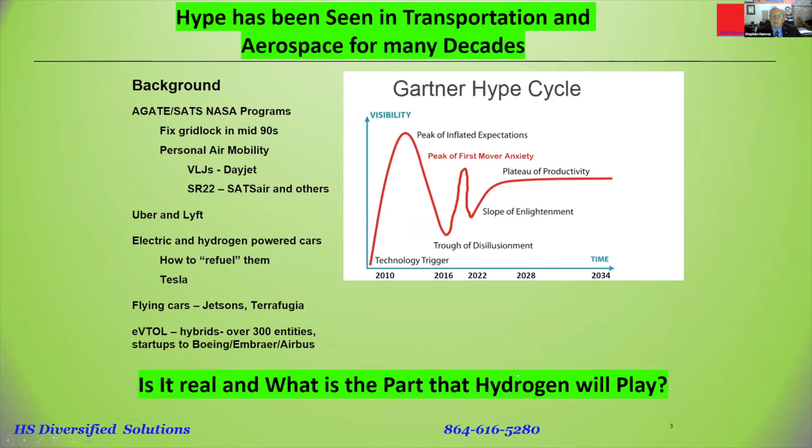Based on that, here's where I think we are today in the eVTOL and hydrogen base, really with eVTOL for all of them. We have just a couple of first movers. The problem is the technology readiness levels, as NASA defines them, are still at the R&D level for aviation applications for the size aircraft we need to carry 2 to 5 personnel, or to go a longer range than current batteries can do.

Standards are needed for both the fuel cells and the power modules, so that we're not dependent on one company's standards like we've been in the past. I use the example of all the different connectors for USB - for one connector, you might need multiple. We'd like to have a standard developed.

We also need standards for vertiports and heliports. We know what it is for current rotorcraft, but we need simple standards because it becomes more personal transportation. I have an extensive rotorcraft and fixed wing background, and I've landed in a lot of really strange places in rotorcraft that were very small - they don't have to be a published airport or a large real estate development. So infrastructure is very important in terms of how we set the standards and how simple we can keep it. I believe we need pre-competitive standards for hydrogen due to the technology readiness level, and standards for the infrastructure.

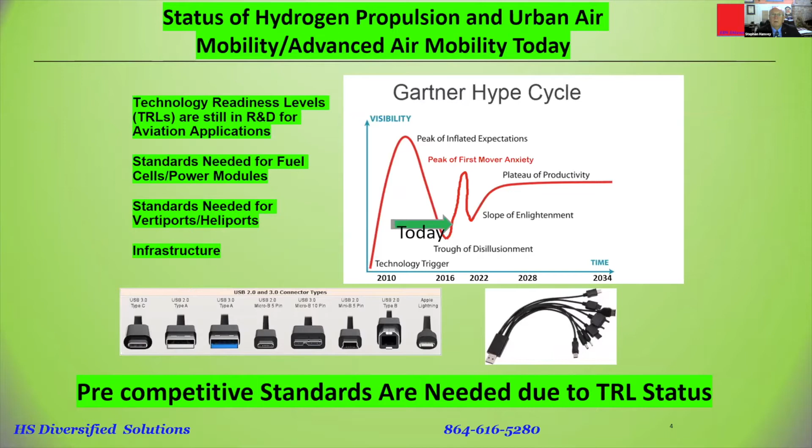So this is, again, my personal opinion. We need to be up here to go into full certification and production - technology readiness levels of 8 and 9. And we need to be in certification at this level, 6 to 8.

But right now, the main areas of liquid fuel cells or gas fuel cells, liquid fuel tanks and gaseous tanks, as well as all the fuel cells - the way we use the heat that comes out when generating electricity, and the cooling with liquid tanks or intermediate pressure tanks - those are still down at the component development level and haven't reached high volume capable companies yet. They know it's coming, they know what they need to do, and I'm going to talk about that a little bit.

That's a holdup, and we have to progress through these TRL levels before we're really ready. That generates the time and dollars needed to bring it to full fruition as a viable customer entity.

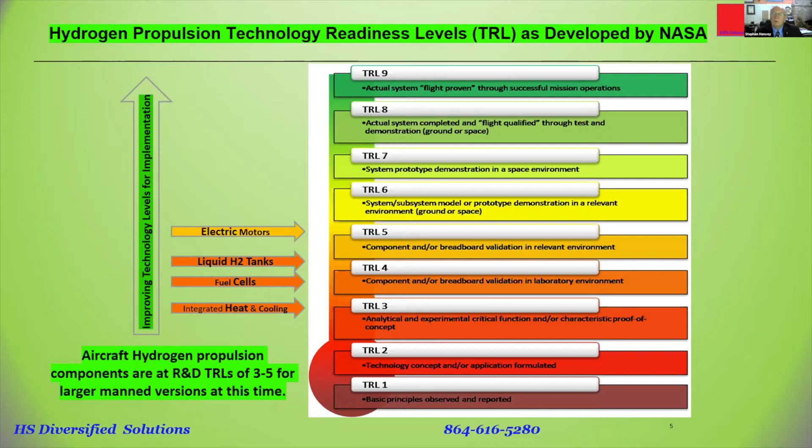What I did is take various public sources of fixed wing aircraft, from large airliners down to small general aviation airplanes, and looked at the percentage of the maximum gross weight for the operating empty weight - structures plus pilot - how much fuel you're capable of flying, and therefore what payload you have left. If you look, the trend from airliners carrying lots of people down through small airplanes, the payload percentage goes up slightly and the amount of fuel goes down. Then when you get into helicopters and rotorcraft, the weight of the payload goes up as a percent.

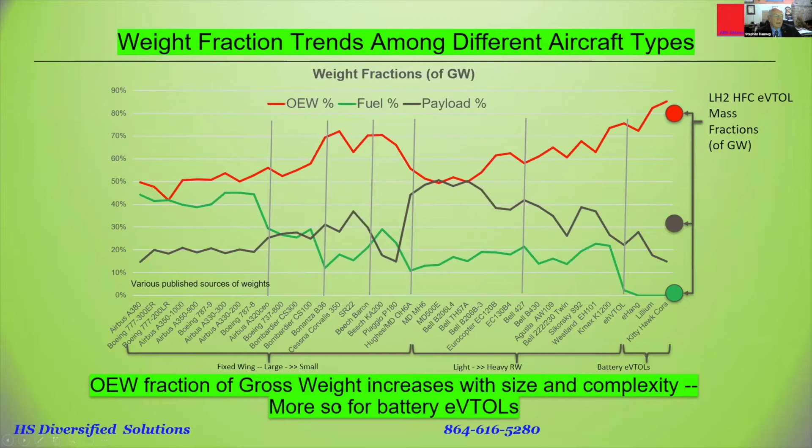This is because the percent of empty weight goes down, and the weight of the fuel stays low. When we get to the third category, the eVTOLs - battery eVTOLs and hydrogen eVTOLs - there's a very small percentage of fuel in the hydrogen case compared to any previous aviation, and there's no fuel for the batteries, but that affects the payload available because it drives the empty weight up. So as a gross generalization, for a liquid hydrogen fuel cell eVTOL, the mass fraction of its gross weight is probably going to be close to 80% for a 30% payload, when you have basically close to zero in terms of fuel - you're carrying your fuel, your energy, with you all the time. This may seem obvious to everybody, but as gross weight increases, the size and complexity drive that gross weight up, and the batteries right now just can't carry quite enough energy.

Having looked at all of that, I look back at general aviation. We started out with piston engines with lots of parts - radial engines with lots of pistons to generate the power we needed. Then in the 1950s and 1960s we moved into the turbojet - the parts were simpler, but it burned a lot of fuel.

Over time, we transitioned to the turbofan from the turboprop and the turbo shaft, the turbofan used in general aviation airplanes with a prop or without a prop, and the shaft used in a lot of the rotorcraft. The technology came from the inner parts of the engine and how they used the fan to take advantage of the exhaust.

At this point, and I'm not advocating for any given fuel cell company, the balance of plant, all the connections you have, are very important. They drive the weight in the fuel cells. Some companies have started out fairly complex, then gone down and become a lot smaller, but their amount of kilowatts per kilogram is very low compared to what's needed to carry 2 to 5 passengers. That's the challenge we have.

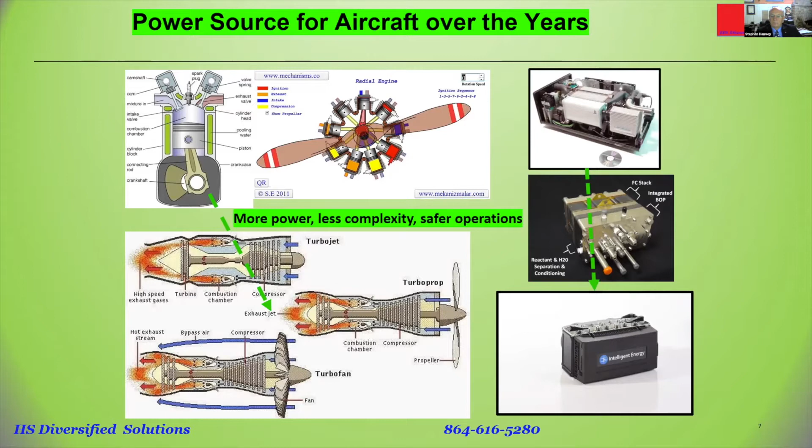This is the type of thought process that we need in the industry to move out of R&D into the technology readiness levels for certification and production, at a gross weight level that will allow us to carry passengers safely.

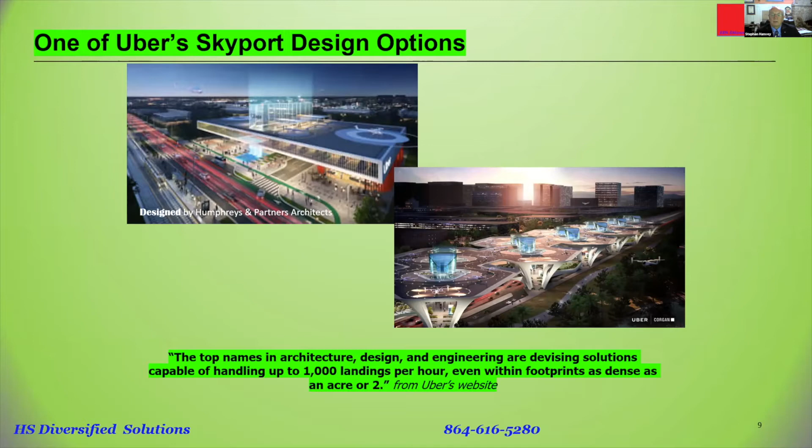Instead, I argue that we have a lot of real estate today in parking lots, sports venues, vertical parking lots, and small innovative concepts like SkyDrive has done, powered by hydrogen, although it's by battery today, that can utilize a very small percentage of this parking lot. And that's where the vertiport standards need to come from. The reason I say that is there's an infinite combination of going from parking lots to personal homes, to sports venues, to schools, to businesses that don't have to go to a central location with this large real estate.

And there are creative ways in certain parts of the world where you can have combined modal transportation and land a small vehicle by creating the right landing space. This is not as big a real estate play as it is in the major cities.

When I ran the company SATSair with 26 SR-22s, we landed on an annual basis in 500 airports. That same area only has 35 regional airports and only 5 major airports that have the large airplanes. So we had a large number of operations that could be done very close to where one's office or home was, and that gave people personal control of their transportation. I think that's what the basis of urban air mobility and advanced air mobility will become as it fully develops over the next couple of years.

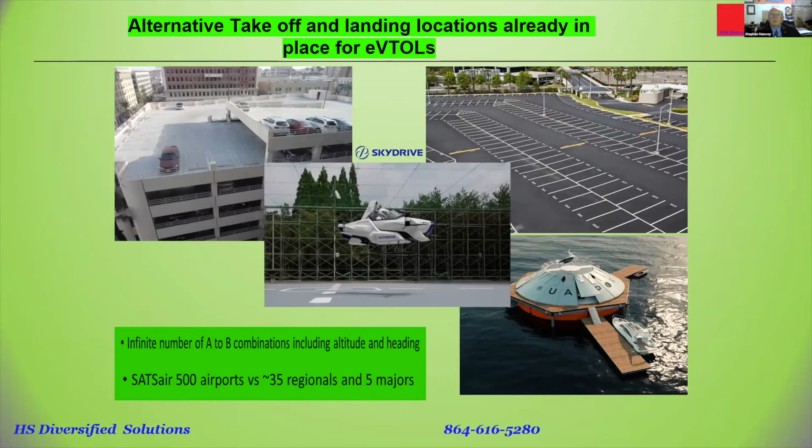We're familiar with hydrogen energy relative to batteries, but I just wanted to highlight it has so much specific energy here. There are people who prognosticate and have a diversity of opinions on cost requirements and what is really the bottom line efficiency when you look at transportation cost, heat losses, and other things that go from battery versus hydrogen versus internal combustion.

Some people think the battery gives you the best overall efficiency. It's not the cleanest because we have a lot of recycled cost, so that's probably closer to 60% at the best. Whereas in hydrogen, if we do co-location with wind and solar or find ways to break through in electrolysis close to the source, that number can go up significantly, and maybe it's closer to 50%.

When we look at heat recovery, when you generate electricity with a fuel cell and the cooling you get out of liquid when it goes to gas, you can recover maybe 40%. So that number may be closer to 60%, putting batteries and hydrogen about the same, but they're still much heavier, and we have to have the infrastructure developed. So there's diversity of opinions about how much it costs to go from solar through the processing and transportation to ultimately get it here. The cost of hydrogen at $12 to $15 per kilogram needs to come down below $5 per kilogram, and that can happen by putting some R&D into this area as well.

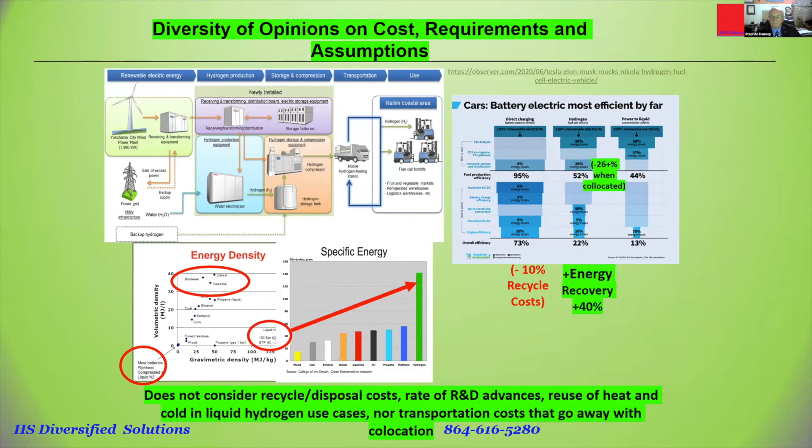These are examples - again, I'm not advocating for any particular fuel cell company - but there's been a standard that SAE has done that's been accepted worldwide for hydrogen station standards. We need to come up with a standard for how we connect together to put in gas or liquid hydrogen, in the same manner I showed the connections for USB at the beginning. But you can see the balance of plant is different at different manufacturers, and we ought to standardize that, because where individual fuel cell companies can make their money is in getting low cost balance of plant to some standard.

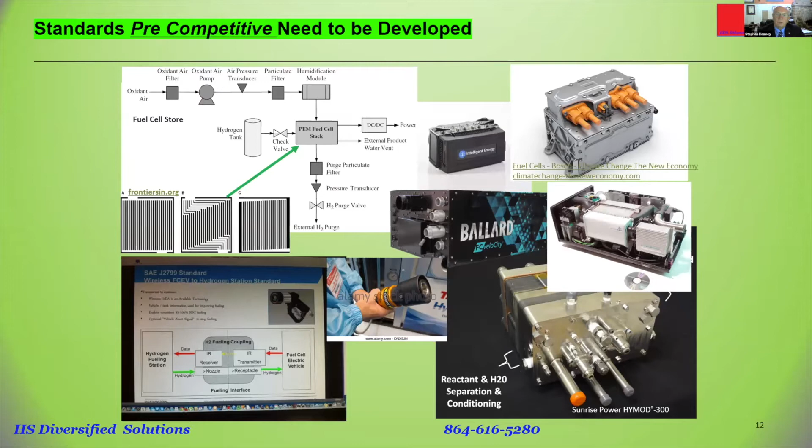And this is where the real frontier is. We know that hydrogen generates about 1.4 volts of electricity, but we're only able to use about 0.6 of it today, and maybe we can get up to 0.7 by the way we introduce the hydrogen in the flow fields within the fuel cells. Just an increase from 0.6 to 0.7 would represent a 15% improvement in power and fuel consumption.

So I don't think there'll be one winner, as I said earlier. I think it'll be a combination. Out of those 300, there'll emerge 10 or 15 companies that will truly plot the future for eVTOLs, and it'll be complementary. Aviation Week and Space made a comparison of the different types of vehicles - cargo, personal, lift + cruise, multi-copters, and vectored thrust - and how many people are back in the concept technology area.

This is the low technology readiness levels that NASA talks about. There's only less than 5 that have gotten out here where they're doing things with battery and trying to make commercialization happen, such as EHang and Kitty Hawk right now, where Beta and Joby are, and Boeing, and where the FAA sees some of these programs. So we're going to have a migration, and I showed it on purpose, from lower size, lower complexity, lower cost, lower technology, lower weight to the higher ones.

And ultimately, maybe we'll get to the anti-gravity. But this causes us to increase the direct operating cost as we get more complex, as we get heavier, and the acquisition cost goes up. And I might add, that's for the personal air transportation. As we do it for regional transportation and come up with those concepts, I haven't addressed that specifically here. As you get more passengers in the vehicle, then obviously the cost can come down.

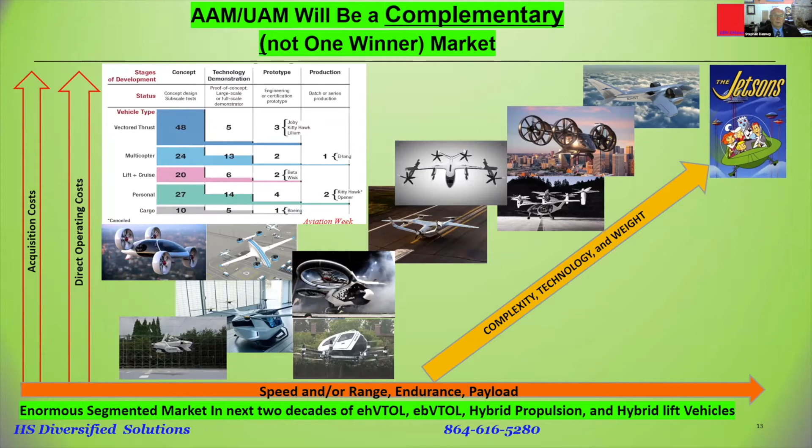And I base this on history. This was a presentation done in 1999 by Dr. Bruce Holmes on the impact of speed over time, as we moved from horses being replaced by cars, and the speed gradually came up. What was important was how fast you went from the door of your house to another house, or the door of your business to another business. As we did this, people started moving to different locations as well.

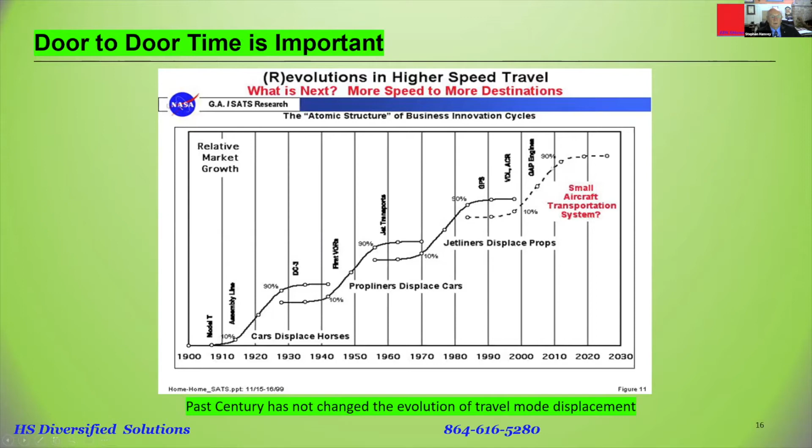COVID-19 has certainly made an impact on that. The personal computer, the ability to work from various locations, to have a virtual conference like we are today, affects where we can work. So that will affect, I believe, the market and how well we do with that market.

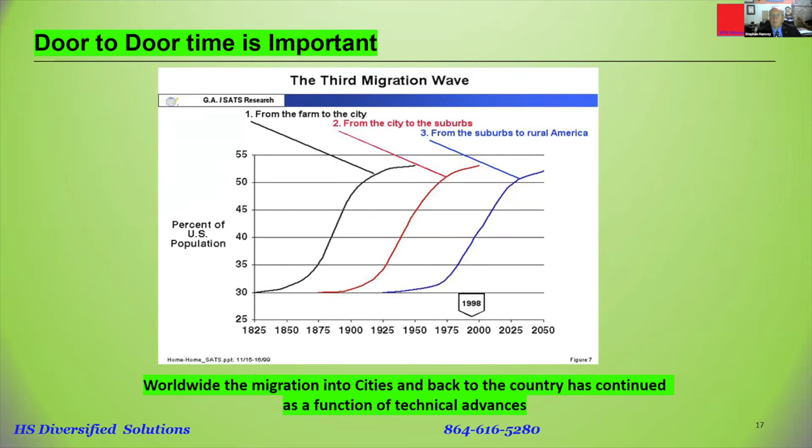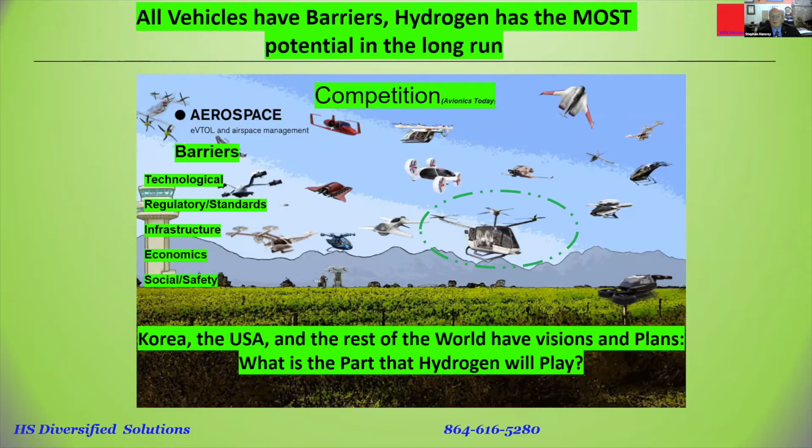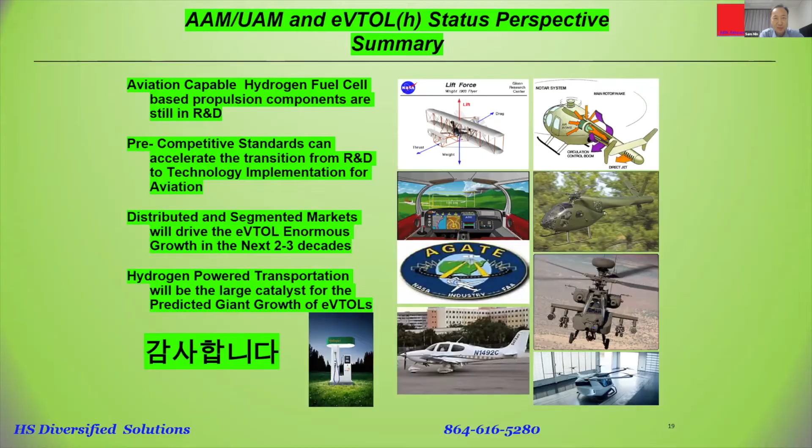We were supposed to have the first panel discussion, but the speaker wasn't available. Phil is here. I propose we go back to panel session 1, since Val is in England, if I know correctly. Considering his time zone, I'd like to propose we go back to panel session 1, then come back to panel session 2. What do you think, Val, are you ready? Yeah, this is Val, I'm actually in California, so if you want to continue with panel 2, that's fine, and then I will join in. Okay, thank you for your understanding. Then why don't we just finish panel session 2?

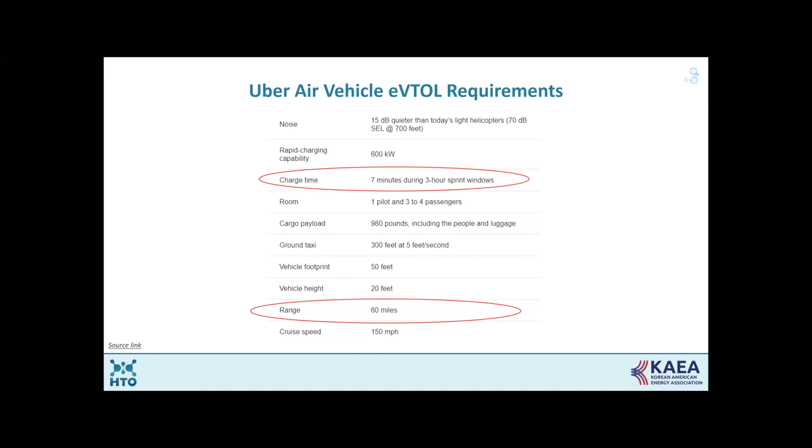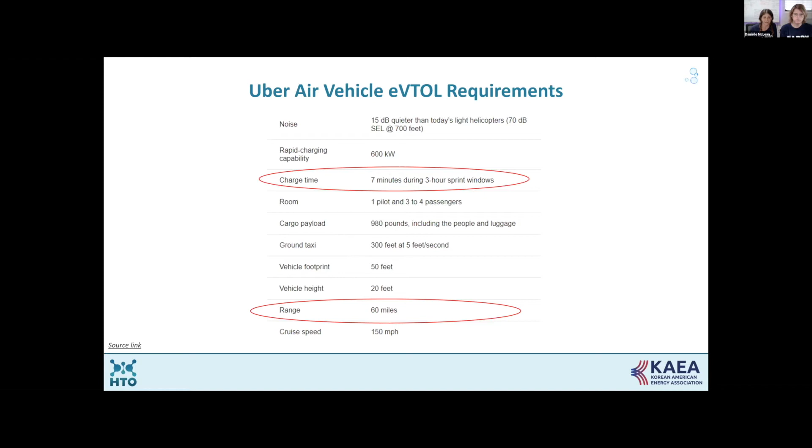A lot of you are probably familiar with these numbers, won't spend too much time on this slide, but in the US we lost 300 billion dollars in 2018 just from sitting in traffic. Back to Uber Elevate - they released requirements, I think in 2018 or 19, for what they'd like to see in charging times and ranges. About 7 minutes charge time - if you're looking at a battery powered eVTOL, that's going to be very difficult to achieve. We've heard of rapid charging batteries coming online, but we don't see them getting to these fast charge times in the projected timeline Uber wants. Further, the range of 60 miles - there are people that can do that, but we feel like we can do better. Let's make a longer range and create a way to charge or refuel them quickly.

This kind of goes over what Uber said they need. That top row shows energy density, specific power, and charge time. What Uber wants - that charge time was 7 minutes, we just rounded it to 10 - and then where current lithium ion technology is. So the energy density looks really good, but the specific power does not. Sorry, I said that backwards - the energy density does not look good and the specific power does. I was thinking of hydrogen when I said that. And so, just like Steve was saying, the idea is basically to use batteries for the takeoff and landing.

We don't see hydrogen being able to do that right now. And to be honest, we don't even see a path to get to that. That would be an interesting area for somebody to look into.

So we see batteries being used for takeoff, that's where you're really drawing a lot of power quickly. So you're going to use batteries for your takeoff and landing, basically your vertical operations. And then when you go into cruise, that's when you can use hydrogen.

And if you use hydrogen for your cruise instead of batteries, you can really extend that range. That's why you see the hydrogen eVTOLs having 200 to 300 mile ranges versus the battery ones, which are 50, 60 miles. Some of them say 120. I'm skeptical.

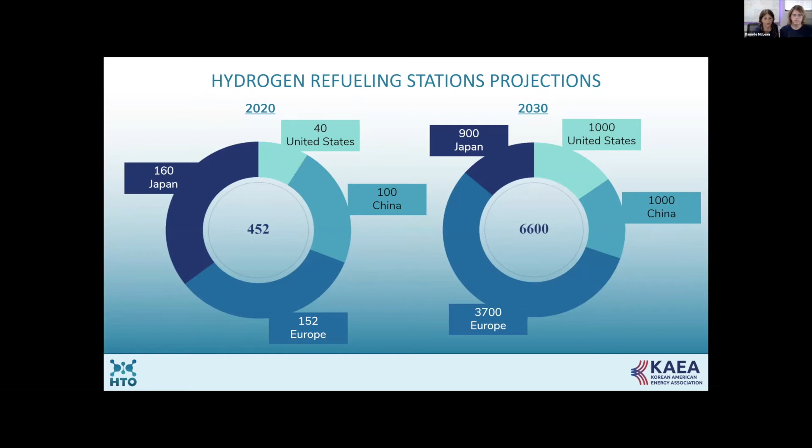So this is our vision. We really feel like the reason why we've included the automotive infrastructure for hydrogen in the previous slides is because we see a vision like this, where if you've seen what Nikola Motors is doing with their heavy duty trucks, the power demands for those trucks are very similar to what we would need in our aircraft. So we don't see any reason why we can't share that infrastructure.

One of the downsides of hydrogen is that it's expensive. One of the things that makes it expensive is the transport cost of the hydrogen. So we believe if we make the hydrogen at or very near to the location where it's going to be used, you can eliminate a lot of those costs, and then also use as much renewable sources as you can to produce that hydrogen.

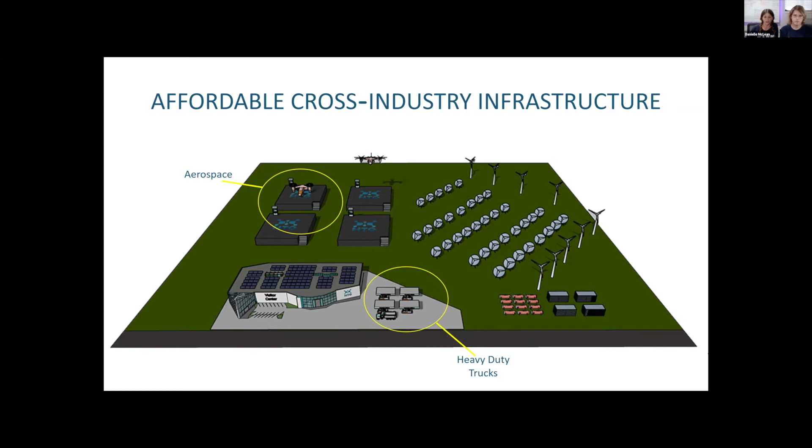So again, this just repeats what we had in our last slide in a 3D version. I really like what Steve said about the Uber Elevate concept of infrastructure just not being feasible.

I think the mayor of LA mentioned that at the Uber Elevate conference, that it wasn't feasible. We actually went to the city of Los Angeles and talked to a lot of them, and not only did they not think it was feasible, they didn't really like the idea of having all these landing locations on top of rooftops. It makes for some really cool pictures for NASA, but it would be very difficult. They felt it would be a difficult sell to the public - how do we sell this as something people are going to want? Has anybody even talked to these building owners? Who's going to pay for that power? And even considering renewables, you just don't have enough real estate on those rooftops to do anything meaningful. So we don't see that as a path forward.

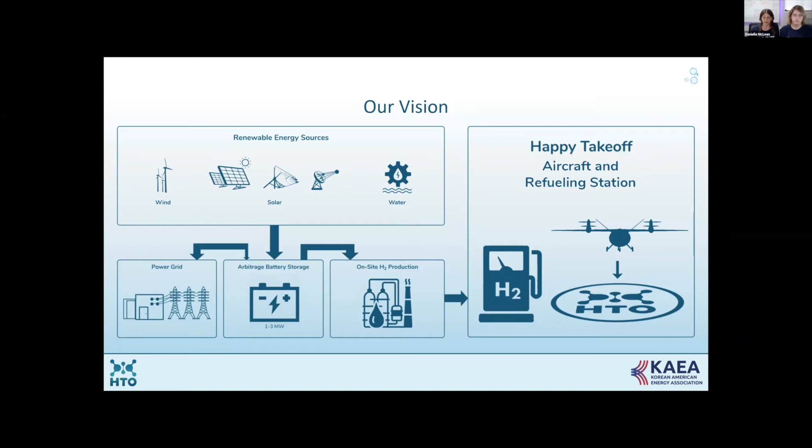We like the parking garage idea, also kind of rural ideas. And then we'll go into public perception.

Public perception of safety - a lot of people, the first thing they think about when we speak of aircraft powered by hydrogen is the Hindenburg. I don't know how well known this is internationally, but here in the US it was an event that happened in 1937, right around the time video camera technology was allowing people to record these events and share them with the world.

This disaster, the Hindenburg, was an aircraft actually designed to use helium, which is much less combustible than hydrogen. But due to the geopolitical climate in the pre-World War II era, there was no helium available for Germany to fill this dirigible. So they ended up filling it with hydrogen, and it ended up crashing as it was coming in to land in New Jersey. It was caught on film, seen by everyone, and the effect still lingers today. It's definitely affected public perception of how safe hydrogen is to use in aircraft especially.

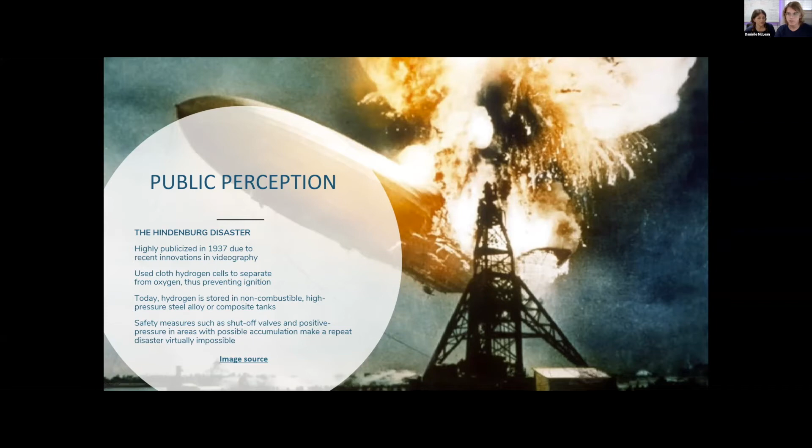Today we're using much more advanced and much safer technologies. So this is, again, Prism - this is our baby, currently in the conceptual phase. We're working hard to get our first scaled prototype made, which would be a small scale model that we're going to use to do some testing, some flight testing, and get some miles on there.

Our goal is to have zero emissions, which means we have to get completely free of fossil fuels to produce hydrogen fuel. We think it defeats the purpose to produce hydrogen using fossil fuels. Our goal is to hit a 250-mile range.

Like Steven said, some of our friends over at HyPoint - not necessarily advocating for HyPoint, but they're our friends and we like what they're doing. We're hoping we can actually surpass that 250 mile flight range. Refueling time we're hoping to be around 10 minutes, much faster than recharging. And we're looking at having a 1,200-pound payload, which would be roughly 6 passengers if you chose the passenger configuration.

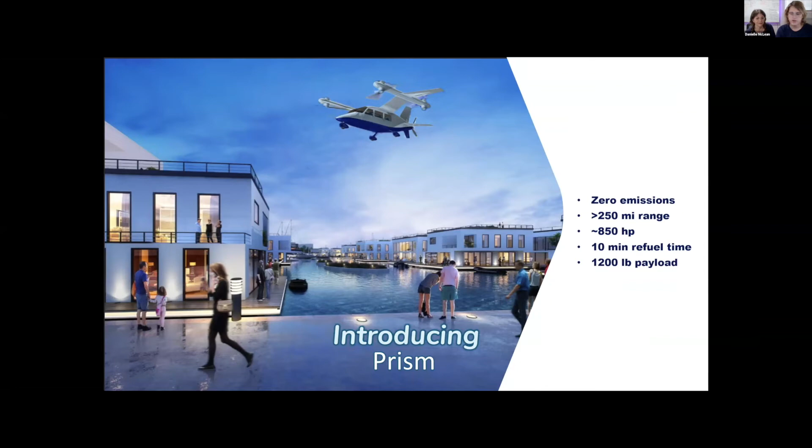Our aircraft was designed by Darold Cummings. He is one of our favorite designers - we think he's one of the best in the world. He designed it to be safe and to also fulfill the requirements of both Uber Elevate and the US military.

So the design has folding wings, which makes a very small footprint, so you can fit a lot in a small space.

The initial design is going to be capable of using AV gas, but the plan is to eventually switch over to a hydrogen powertrain. The AV gas would be used for potentially certification purposes only.

So we have a fixed wing. We're the only aircraft we know of that's powered by hydrogen and also capable of vertical takeoff and landing and has a fixed wing.

So we think that's kind of our niche that we found. And like Steven said, we don't think it's going to be one winner, we think it's going to be several winners. So we tried to find a niche that would complement our friends who are building aircraft as well, but that would allow us to thrive.

So like we mentioned, fewer refueling stations would be necessary with hydrogen. And like we mentioned before, it's going to be a hybrid system using batteries to power the 8 vertical lift propellers that you can see there. They're stacked, in stacks of 2, and they're made that way as a safety redundancy feature.

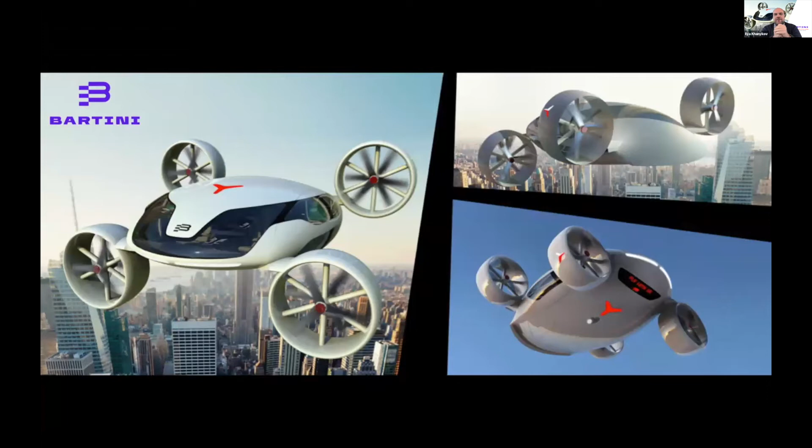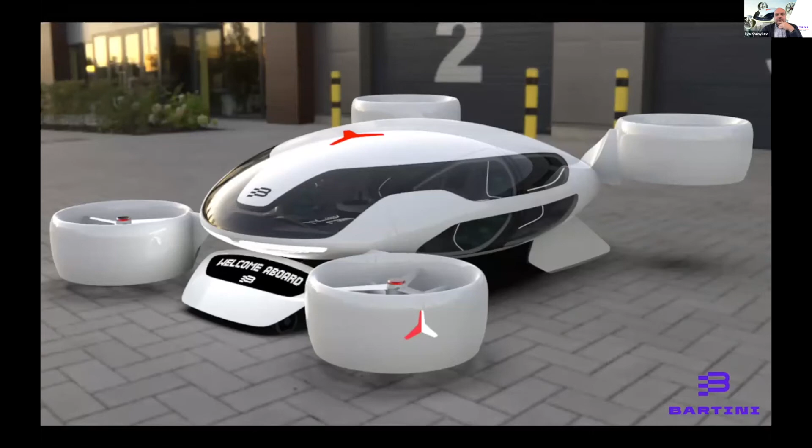I'm Ilya Kanikov, and I'm doing this electric vertical takeoff and landing vehicle called Bartini. We are a team of passenger jet builders who were possibly the first in the industry to team up with the best automotive engineers on the planet, Italdesign, to get you the two-seater and the four-seater, each of which will be powered by either a lithium battery or a hydrogen fuel cell.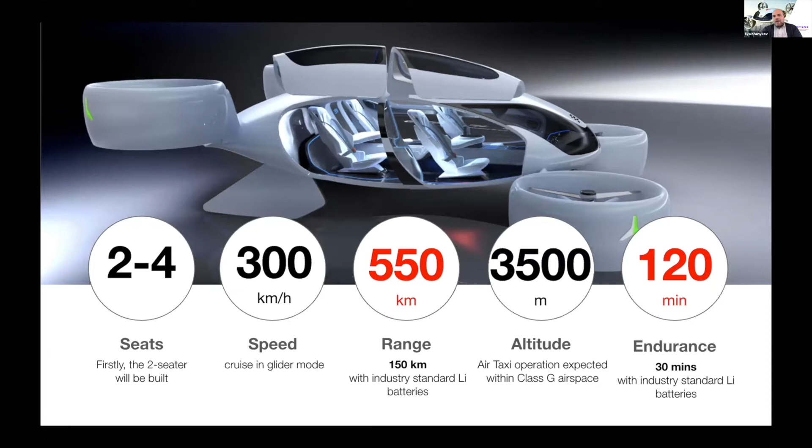Our configuration combines the benefits of hovers and winged aircraft, so it's a small footprint with flight efficiency. The wide carrying body will provide aerodynamic lift and the comfort of a spacious cabin. To that, we add low noise from the ducted fans and the highest safety standards of civil aviation.

For us, the choice between lithium and hydrogen powertrain means much more than a choice of a component or a choice of ground handling systems. It means the choice of scalability, the choice of price, and actually the choice of the future in which you as customers will get the service of transportation.

So we call this the operational perimeter. And the question is: is it about private owners in flying clubs, or commercial operators running massive air taxis? We believe, as we are now transitioning from ground to air, much like a century ago we transitioned from horses to cars, for the air taxi to happen, all peripheral systems must be ready to scale.

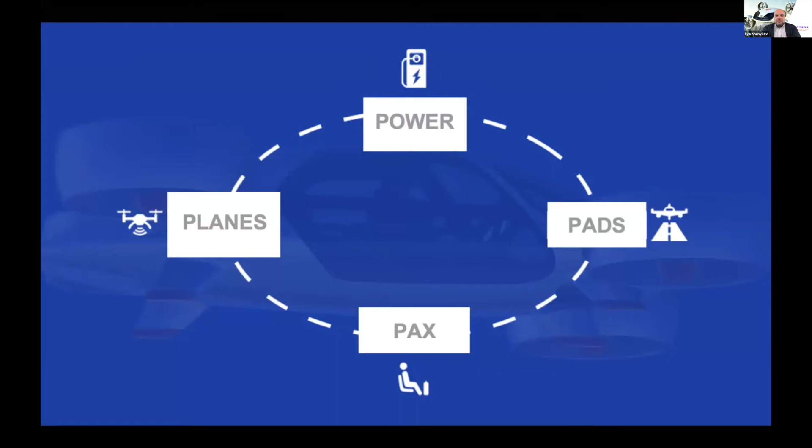I'm also an advisor to McFly Aero Infrastructure, a strategy think tank and consultancy for property owners. To become a technology integrator in the future, we deal with preliminary design of ground facilities and air traffic architecture in various parts of the world. That is why it is our job to trace dependencies and evaluate systems interfaces across the emerging value chain - the value chain for the service of flight, that is, not for the aircraft.

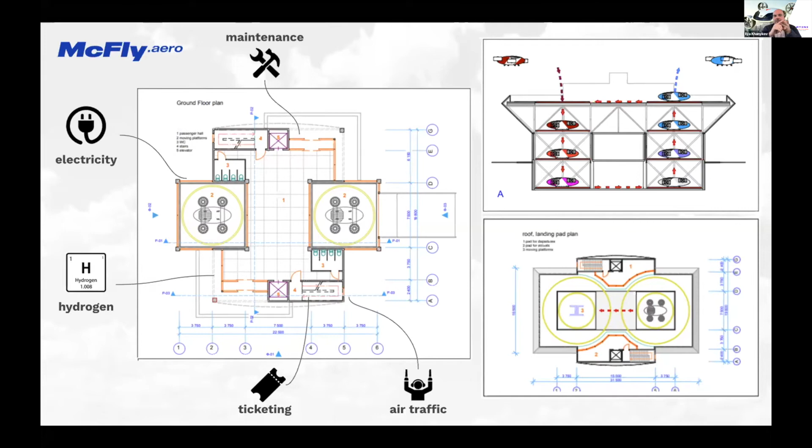The first question for air taxis is: what will it be? What will be the systems design? Will we fly between large hubs, or will there be a multitude of small landing pads? So sky hubs or sky stops.

Quite frankly, from the user perspective, what we generally want from transportation is to be on demand, seamless, and affordable. That's what we want. We also want controlled privacy. So far we may choose a bus, a train, a taxi, or a personal car, but we have always compromised between on-demand seamlessness, affordability, or privacy.

With this in mind, for the future of aviation, we don't want to compromise. We want sky stops, not hubs, and we want them every 5-10 minute walk from any final destination. We want them to integrate into the architectural and cultural environment, and perhaps serve not only as passenger, but also delivery pickup points. Our choice between lithium or hydrogen will either limit or enhance our ability to make such systems.

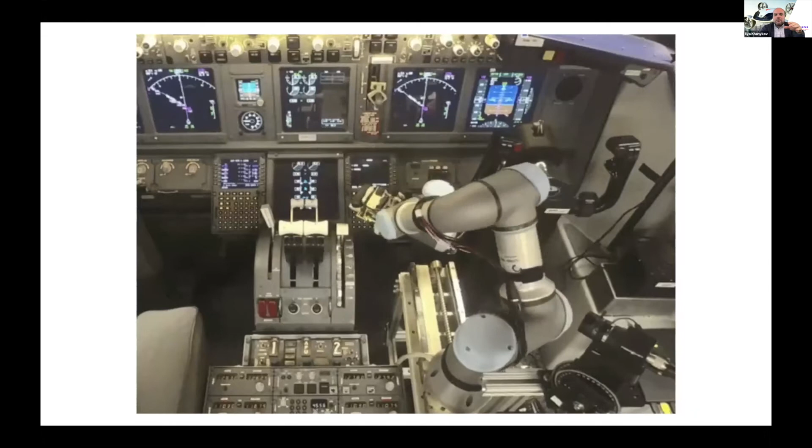Piloted aircraft may be deployed first, but even they will most likely follow strict routes, quite unlike general aviation today. And it is also our view that we're most likely quite far away from true and full autonomy on a vehicle level. So prepare to get your operator's licenses for onboard or remote piloting pretty soon.

Speaking of routing, secondly, I wanted to touch upon that most likely air taxi users will not peek through your windows, as many are concerned. The air taxis will not fly over critical facilities on the ground. There will be flyways or on-demand flight paths, and that will be monitored and controlled through transponders.

Systems like Astra UTM can already track thousands of airspace users simultaneously, and can handle flight requests, approvals, monitor designated airspace, perform deconfliction, and so on. So your home will most likely be surrounded by restricted airspace, much like today it is encircled by a garden.

So now that we're comfortable about these two, let's get back to energy and allow me to track one chain of dependencies for you. Lithium gives 30 minutes of flight and 90 miles of range - that's San Francisco to Salinas or Monterey. Hydrogen gives 2 hours and 340 miles - that's all the way down to Santa Monica, or all the way from Seoul to Jeju.

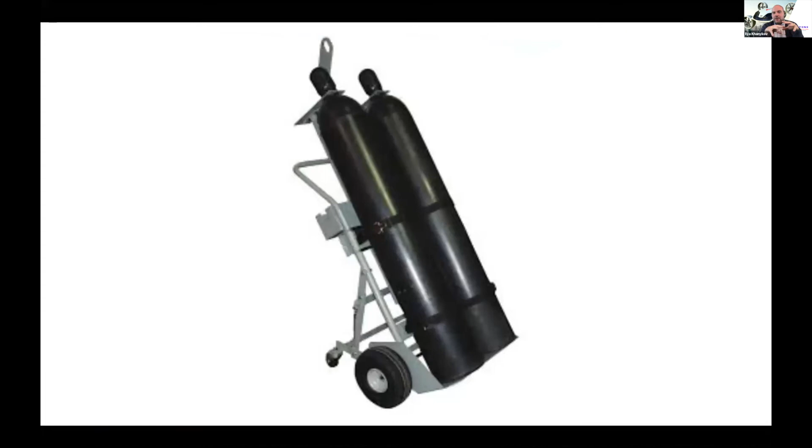But just think, what if you didn't need to connect a SkyStop to the power grid? What if we could store the energy on the landing pad by distributing hydrogen, for example, in tanks? Perhaps even using the same fleet during off-peak hours. Or better yet, what if we produce hydrogen on site using solar? Then we can have sky stops in almost any place, and that would unlock so many more destinations and make the system so much more scalable. So the question stands, why are there not so many eVTOLs planning to use hydrogen?

Well, this is not something you can easily do or switch to. First of all, the aircraft has to be designed from the onset to use hydrogen fuel cells. The form factor is very demanding. For example, with batteries, you could place them all over the body of the aircraft, and many designers and developers do that, using batteries to balance the weights. But fuel cell and hydrogen tank are heavy and bulky.

So Bartini was initially designed to use hydrogen fuel cells. As you can see, we have allocated space for it. Hydrogen fuel cell technology was not common when many of the eVTOL designs were ideated. That's another reason why they may not go for it. And still, yet today, the hydrogen technology that is now commercially available is not the one that we need.

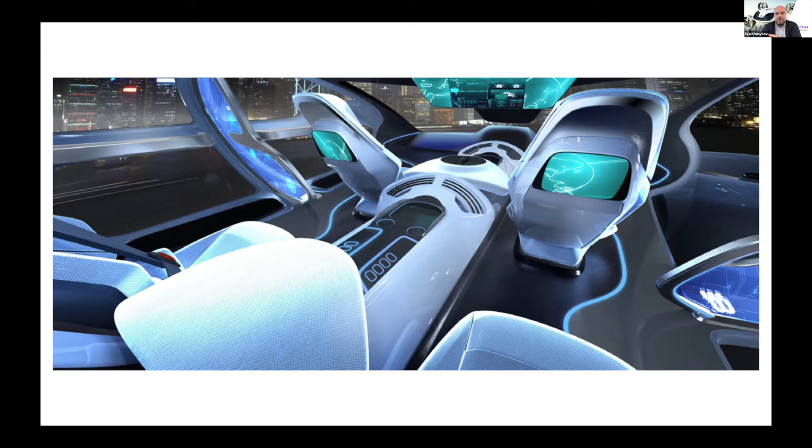Stefan was talking about this. There is uncertainty about availability of that technology. The liquid-cooled hydrogen fuel cells, the ones used in cars and buses, are too heavy. We, the eVTOL makers, need air-cooled fuel cells, and this is a new product. We work with probably the world's leader in developing such technology, a company called HyPoint. I'm glad to name them again because they deserve all this credit.

We have realized early on at Bartini how important it is to have more energy on board, and how unlikely it would be to get it all from lithium technologies. So we made a bet that commercially available, air-cooled, high-density fuel cells are closer than higher-density batteries.

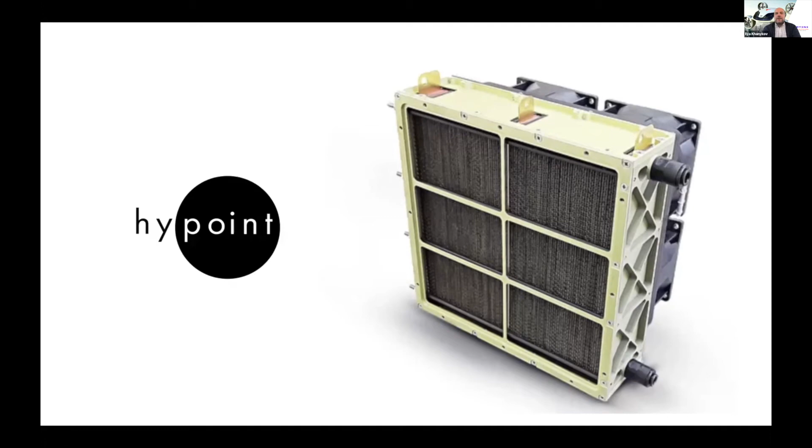There are also other technological challenges connected to placing a hydrogen fuel cell into the craft. Such challenges include additional structure strength, the air ducts for incoming and outgoing cooling flow of air, and rearranging other peripherals that are required for the fuel cell to operate. We should also not forget about certification of such a powertrain to be used for commercial aviation.

At the same time, it was a big bet for us a few years back, but we see now a lot of traction towards hydrogen. These days, regulators are working all over the world, and we believe that embracing hydrogen will unlock the true potential of electric air travel.

Another usual concern is that today the fuel cell and hydrogen itself are quite pricey. So many think that hydrogen travel will actually be more expensive than that on lithium. And after all, you can see that the mile in a hydrogen-fueled Mirai is almost 3 times more expensive than the mile in a gasoline-fueled, say, Camry.

But unlike cars, there are so many more components, like I said, in aircraft operation than just energy. Their aggregated efficiencies can be overwhelming. For example, you need to replace the worn-out lithium battery a few times over the life cycle of the vehicle, usually after 1,000 or 2,000 recharge cycles. And you don't need to replace a fuel cell.

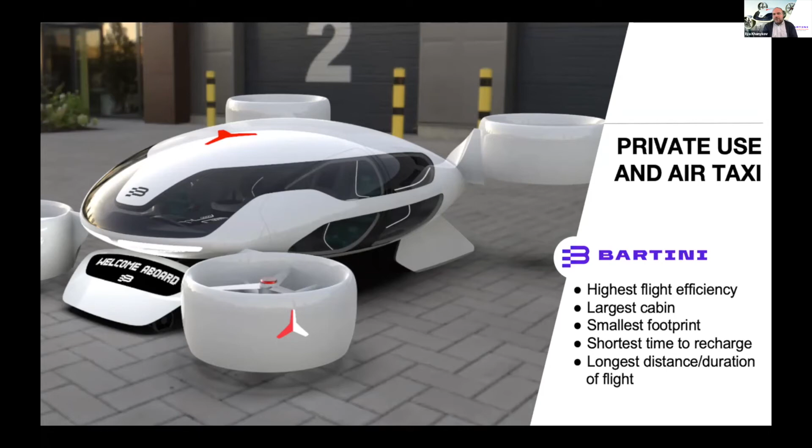So summing it up, hydrogen enables the same operation with a smaller fleet, and the operator will pay for less ground time per vehicle, and less maintenance and handling will be required. SkyStops can be more easily built in more locations, and hence distribution and availability of sky stops will create more demand, hence lower prices. Vehicles will have more energy on board, hence more efficient air traffic management and simpler and cheaper ground facilities.

So all these together constitute important system-wide efficiencies that hydrogen technology is able to unlock, and those considerations are far beyond just component and energy unit costs. Speaking of which, of course, we should not forget that fuel cells will only go down in price when they get to mass production, and hydrogen will cost far less when more of it is produced using renewable energy.

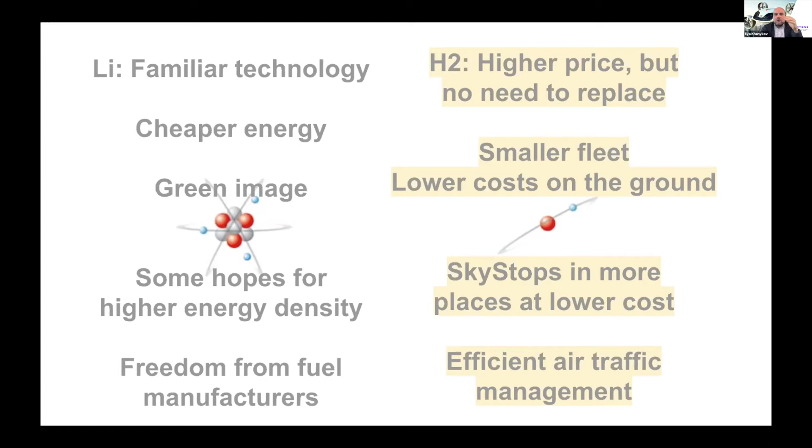So we should not underestimate how the choice between hydrogen and lithium is a choice of the overall system design. And actually, this choice is being made today, as we speak, by the variety of regulators, cities, infrastructure developers, and those client side choices, or choices on the operator side, drive eVTOL design. Please don't forget, it takes a while to make and certify an aircraft. So the choices you make today inevitably lead to product design decisions we make today, and those will stick for years.

It is important to make sure that those decisions do not create unnecessary constraints in the future. And lithium may seem a good option today for closely knit smaller urban air systems, especially if they are designed as big sky hubs that have good power connection in certain limited number of places. But hydrogen already today looks like a more likely future-proof option.

Hard to come up with numbers. Thank you, Daniel, for doing these projections.

I think it deserves a PhD dissertation to actually go through all the value chain and see how different decisions, how different scenarios kind of lead to other efficiencies and other scenarios. But one thing we should not forget is the environmental benefits of fuel cells compared to what may be considered an ecological disaster of even recycling a lithium battery. So I do believe we should work together towards more community acceptance of this technology, more regulatory awareness, and availability of this technology for eVTOL developers and manufacturing companies like ourselves. So thank you very much for your attention.

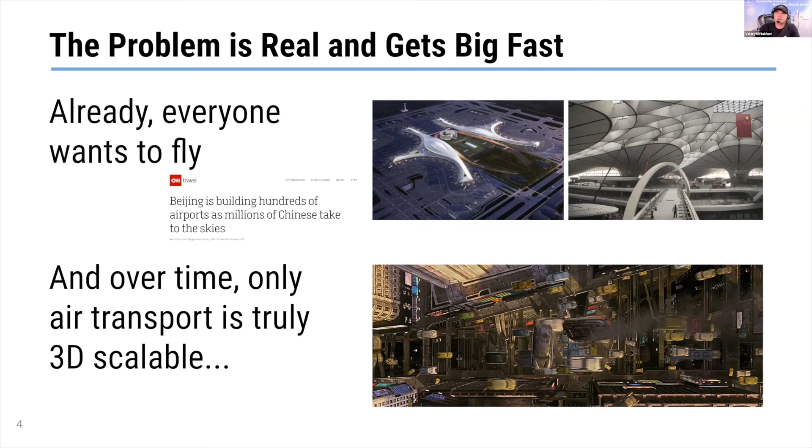And of course, here is the Fifth Element - nice movie, those who haven't seen it, but very visionary - and that's what we're going to have. And that's a lot of additional aircraft in the air. So we need to solve it.

So how do we solve it? There are basically 6 different ways to think about it. And we at ZeroAvia, as we started about 3 years ago, did this thinking from the first principles perspective. I'm a physicist myself, PhD in physics. My management team is similarly suited as well. And we looked at the fundamental physics of various solutions.

So of course you have batteries - this is the first one here. Then you have turbine hybrids. Then you have biofuels. Then you have synthetic fuels. Then you have hydrogen turbines, which is interesting - we'll talk a little bit about it. And then hydrogen electric, hydrogen fuel cell, and electric motors. And we looked at all of these from a fundamental perspective - energy density, efficiency, theoretical limits, all of that. And this is what we found.

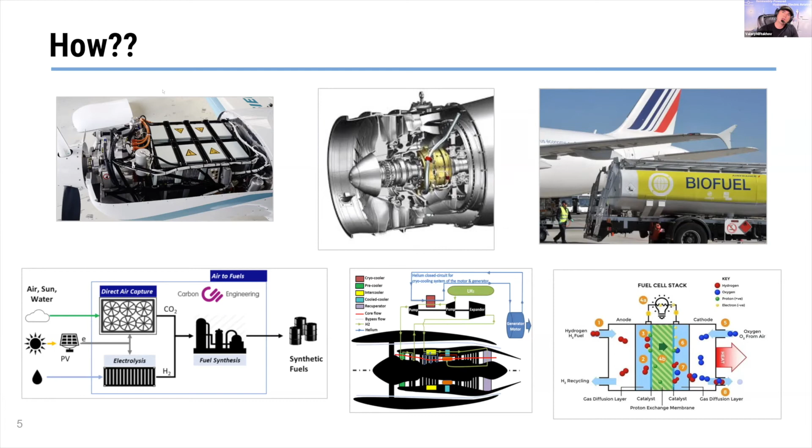On battery electric, we just have fundamental blockers. Again, I'm not going to spend a lot of time - we already talked about it, energy density, all of that. In addition, cycling, material sourcing issues and whatnot. Turbine electric, yeah, could work, but it doesn't really make any sense. You're not extracting any significant fundamental improvements in fuel efficiency.

Biofuels can't really scale. If you look at plants as a way to convert sunlight into fuel, that's just dumb - it's not getting any kind of efficiency. It's 500 times less efficient than solar electrolysis on the same piece of land. And you're not even talking about the water issues, environmental impact of agriculture and all those things.

So really what remains at the bottom is our 3 hydrogen-derived solutions. Synthetic fuels take hydrogen - you make hydrogen through electrolysis, zero emission, because no other way of making hydrogen will really scale. So you make hydrogen in each of those cases. And in the first case, you then have other chemical plants to convert that hydrogen into synthetic fuel. The benefit is you can use that synthetic fuel in the existing engines and call it a day, at least on the emissions basis, on the CO2 emissions basis.

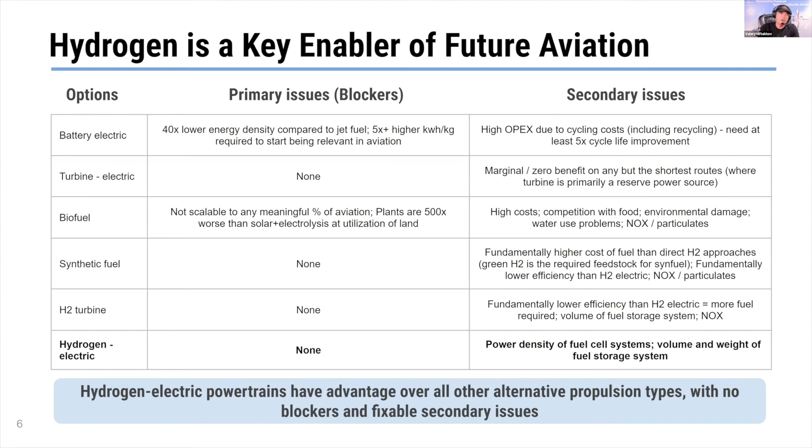You look at it and really you combine the superior energy density of hydrogen, 3 times better than jet fuel per kilogram basis, with the superior efficiency of the electric powertrain. Combine the two and you get the best solution. That's what we think is going to happen over time. What we need to work on are secondary issues: the power density of fuel cell systems and the volume and weight of fuel storage. That's some of the big things we at ZeroAvia are working on.

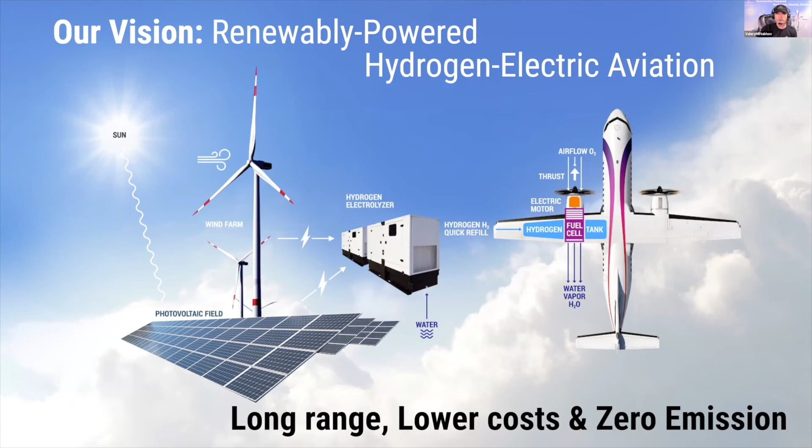Our vision is renewably powered hydrogen electric aviation: make hydrogen on site at the airport from local renewable supply, and fuel the planes right there. We can deliver not only zero emission, but also lower costs and match the range of fossil fuel aircraft through that. We also think this product is going to be better than jet engines, just similar to how electric cars are better products compared to gasoline cars, even internal combustion cars. Hydrogen electric aircraft will be a better product compared to fossil fuel aircraft.

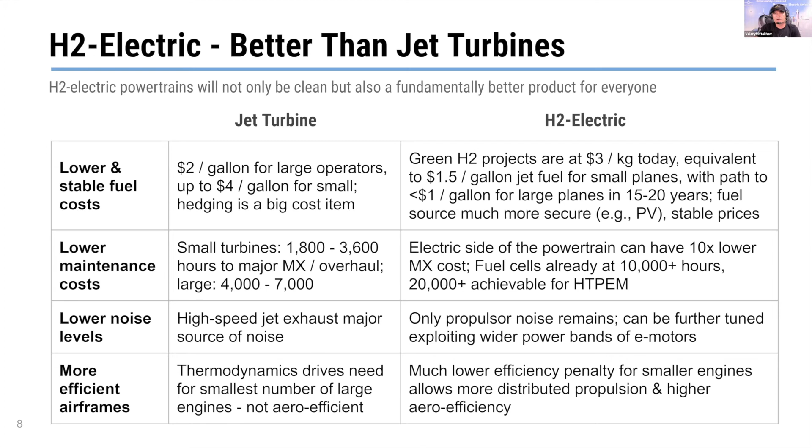You have lower and stable fuel costs, whereas the industry today spends a lot of time and money hedging against fluctuations of oil prices and whatnot. None of that is here, electricity is a much more stable commodity. Even if you don't source it from dedicated renewable arrays, and if you do have a dedicated renewable source, then complete stability. Lower maintenance costs again with electric powertrain versus internal combustion, high pressure, high temperature, lower noise levels from electric powertrain, and the ability to build more efficient airframes. Once you have electric propulsion you can think about distributed propulsion, various solutions on thermal management and how you deal with drag. So more design space opens up.

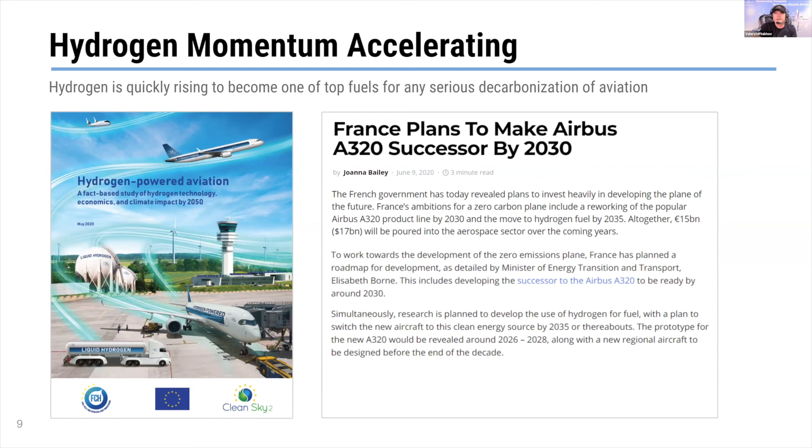It was great to see over the last 12 months especially that hydrogen momentum is accelerating. We were participants in a study that the European Union put out together with McKinsey earlier this year in May, that basically said the future of aviation is in hydrogen, and we were profiled in that study as well. Then you saw what the French government did, and Airbus announced just two weeks ago, all in on hydrogen as the future of aviation. I sat on a panel at KAEA with Guillaume Faury, the CEO of Airbus, and he basically made my pitch for hydrogen. It was great, so we see the majors of the industry are coming in as well.

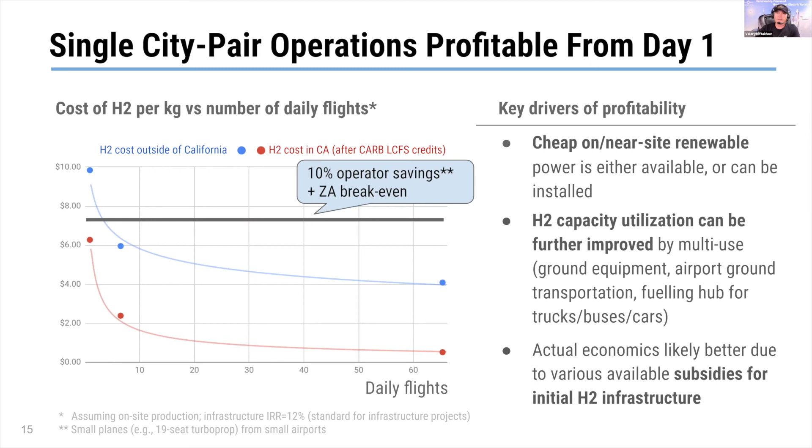Overall, the fuel market is very attractive—$200 billion today in fuel. We think we can, over time, move the entire aviation industry to hydrogen, and that's a huge market, 50 to 100 megatons of hydrogen a year.

This looks large, but 100 megatons is what the industry already makes and uses today worldwide—fertilizer, oil refineries, industrial use cases consumed, I believe last year, over 80 million tons of hydrogen being produced, stored, and used in those processes. So the industry knows how to make it, store it, use it, and safely handle it. This would mean doubling it by 2050, but it's not starting from zero.

But it is a huge new market, so we have a lot of large fuel companies and industrial gas companies very interested in this potential.

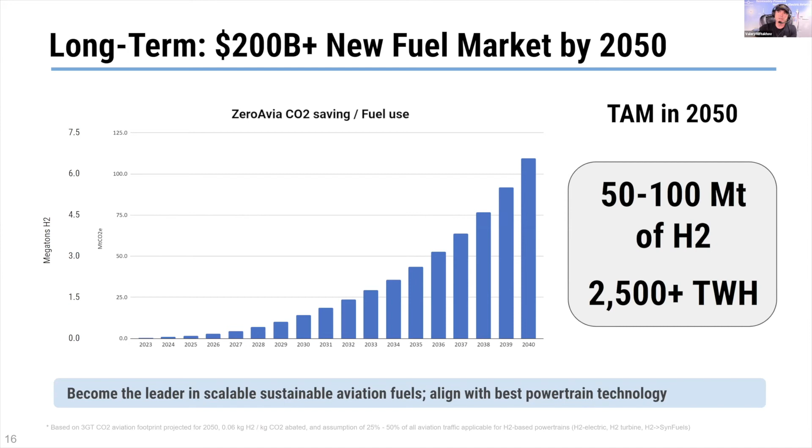Since we've been so active in the market and have actually done a lot of tangible things, we have hardware in the air. We're the only company with hydrogen fuel cell aircraft of this size up in the air, and we want to continue that leadership.

We got a huge footprint out there, captured attention not only of the media but also the operators. We have a number of signed LOIs. We have discussions with all the majors, well not all, but many majors, new vehicle manufacturers, and the governments. I already mentioned the UK, and there are some other governments looking to support us. So I'll stop here and see what questions you have. This is the message I want to leave you with: it's not only the future, it's reality, and it's becoming real, and we're making it happen.

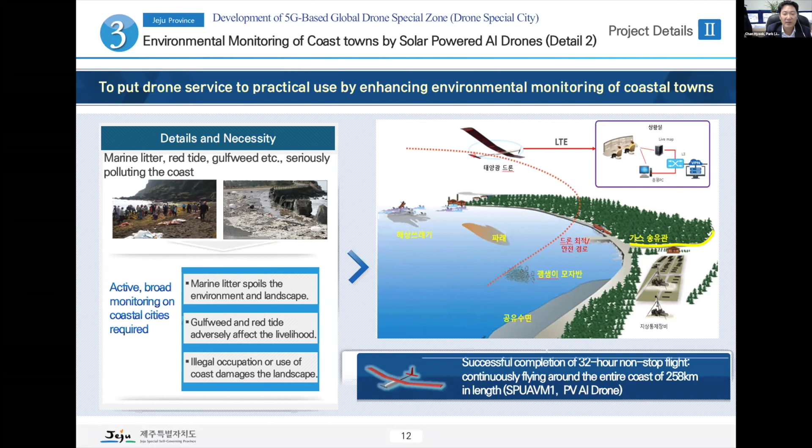두 번째 실증 내용은 태양광 드론 기반의 해안도시 환경 모니터링 내용입니다. 제주도에서는 태양광 드론을 이용해서 올해 32시간 연속 비행하는 데 성공하였고, 최근에는 제주 공항 지역을 제외하고 제주 연안 전체 258km를 한 번에 비행하는 것을 성공하였습니다. 그럼 이제 제주 MBC 방송국에서 태양광 드론으로 제주 해안에 모니터링하는 뉴스 영상을 보여드리겠습니다.

소형 항공기처럼 생긴 고정익 드론입니다. 제주 해안을 날아다니며 괭생이 모자반이나 쓰레기가 밀려오는지, 안전사고가 발생했는지 여부를 모니터링합니다. 보통 드론의 비행시간은 30분에 불과하지만 이 드론의 몸체엔 태양광 전지판이 붙어 있어서 7시간 이상 비행이 가능한 게 가장 큰 장점입니다.

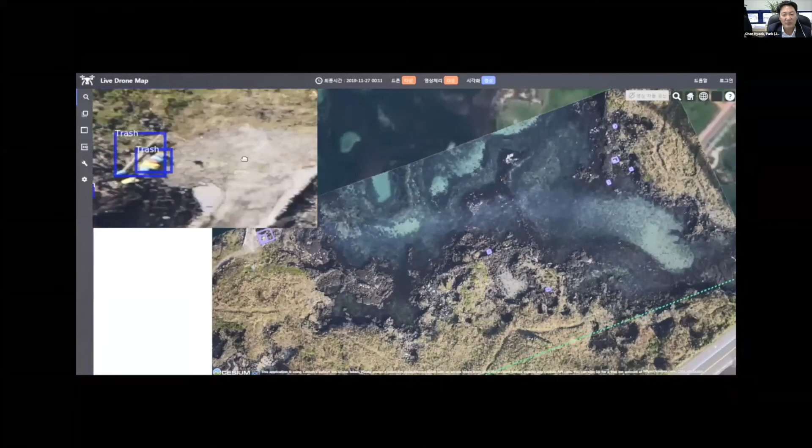이번 영상은 태양광 드론으로 LTE 통신망을 이용해서 실시간으로 영상을 전송해주는 화면입니다. 모두 실시간으로 자동 매핑과 함께 AI 기반에서 해양 쓰레기를 탐지하고 있습니다. 파란색 부분과 같이 작은 페트병 하나까지 자동 탐지하는 데 성공하였습니다.

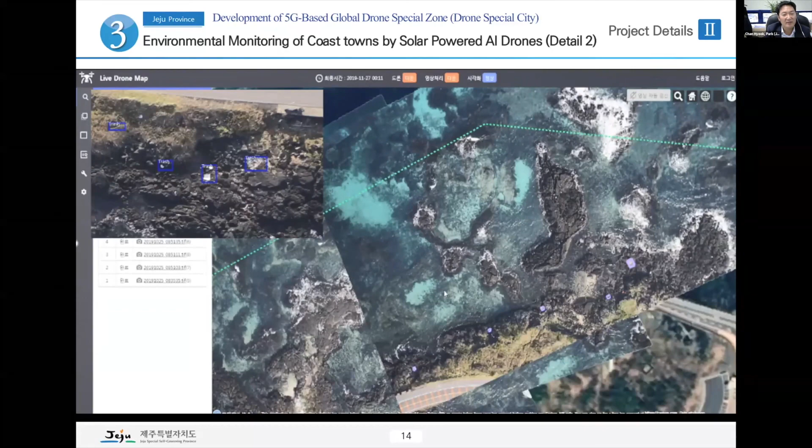한라산 등반에 나섰던 60대 관광객이 목숨을 잃는 사고가 발생했습니다. 겨울철이 되면서 산악사고가 잇따르고 있어 겨울 산행에 각별한 주의가 필요합니다.

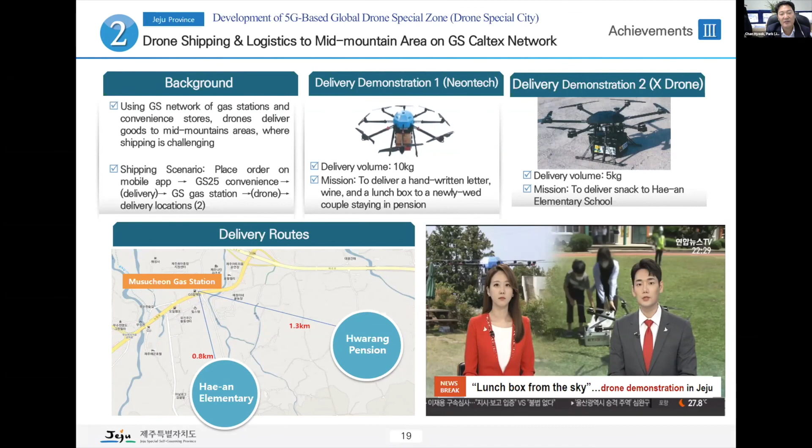배송 시연 행사를 개최했습니다. 정지훈 기자입니다. 주문받은 물건들을 차례로 실은 드론이 경쾌한 소리를 내며 하늘로 오릅니다. 배송지로 향하는 비행 영상은 실시간으로 전송됩니다.

신혼부부를 위한 도시락과 편지를 실은 첫 번째 드론은 1km 떨어진 제주의 한 펜션에 무사히 도착했습니다. 부부는 마치 하늘에서 선물을 받은 듯한 기분입니다. 감사합니다. 잘 먹겠습니다.

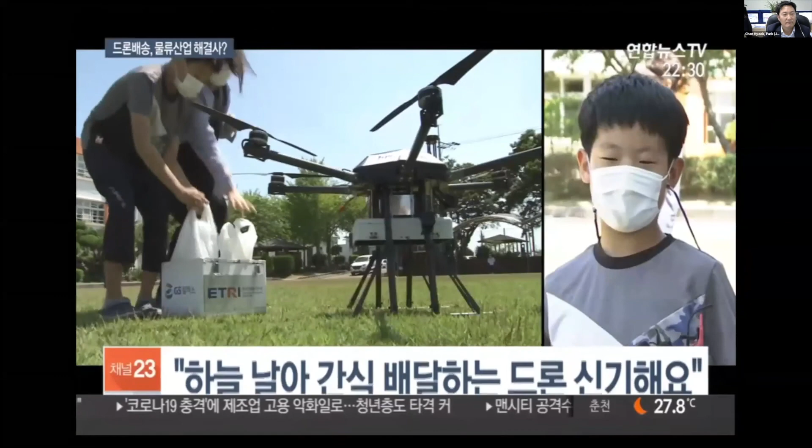간식을 실은 두 번째 드론도 무사히 목적지에 도착했습니다. 하늘을 날아 배달된 간식을 받은 어린이들은 신기하기만 합니다. 착륙했을 때 뭔가 멋있었고 마음이 좀 많이 떨렸어요. 이제 미래 발전해서 드론으로 배달도 하는구나 이 생각했어요.

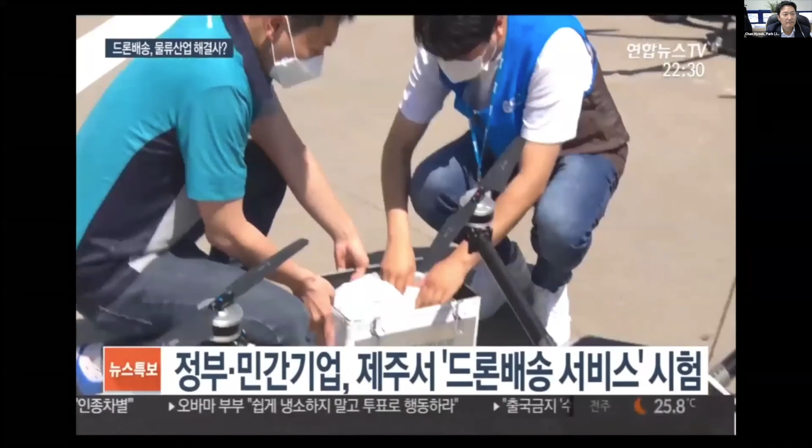미래 기술로 불렸던 드론 배송이 제주에서 시연 행사를 가졌습니다. 드론 배송은 앱을 통해 물건을 구매하면 기존 편의점이나 주유소에서 주문한 물품을 드론으로 전달하는 서비스입니다. 산업통상자원부와 제주도, 민간기업이 힘을 모았습니다.

현재 중산간 지역이나 제주도는 전기차 육성 산업을 추진하고 있기 때문에 기존 주유소는 향후 70% 이상 폐업이 전망되고 있습니다. 따라서 기존의 주유소는 새로운 비즈니스 모델 전환이 필요했고, 전기차 충전소 역할과 함께 퍼스널 모빌리티 거점 센터와 드론 배송 스테이션의 거점 역할로 전환하는 사업을 실증하고 있습니다.

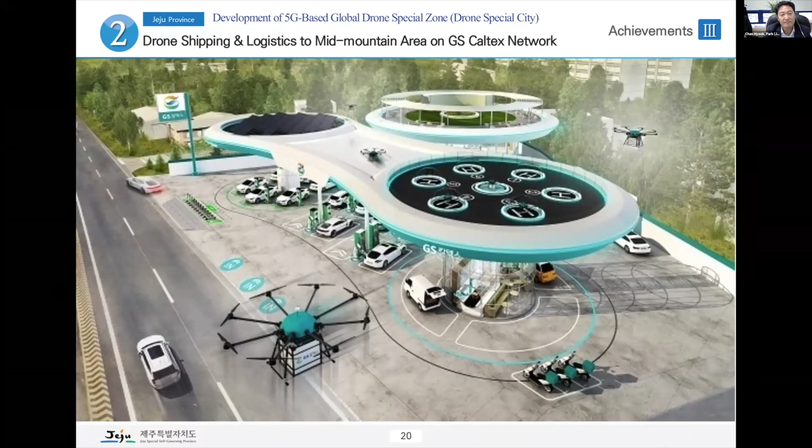그럼 이제 마지막으로 향후에 추진하게 되는 제주 드론 규제 특화 도시와 UAM 실증 계획에 대해서 설명을 드리고 마치겠습니다. 우리나라는 19년도에 드론법이 제정되었고 올해부터 전면적으로 시행하게 되었습니다. 이에 따라서 국토교통부에서는 특화 도시를 공모하였고 제주도 역시 신청서를 제출하였으며 최종 11월에 확정될 예정입니다.

선정이 확정되면 우리 제주도는 21년부터 3년간 11개의 서비스 모델을 대상으로 제주 전 지역에 대해서 총 사업비 170억 규모로 특화도시를 운영해 나갈 계획입니다. 특화도시 운영을 통해서 세계 드론의 섬 제주로 글로벌 드론 메카 도시로 비상할 계획입니다.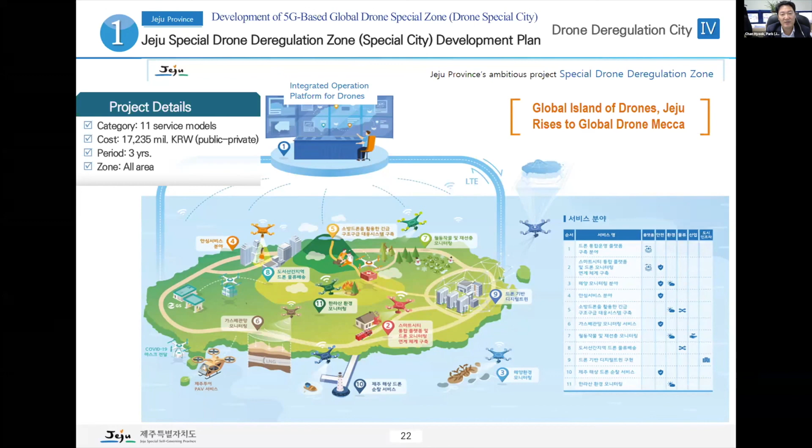또한 차세대 드론 모빌리티 서비스를 위해서 드론 택시 에어 투어 서비스 실증을 추진할 계획입니다. 현재 제주도에서는 아주 구체적으로 드론 택시 비행 시행 계획을 가지고는 있지만 공식화하기 어려운 부분이 있어서 자세한 설명은 생략하겠습니다. 향후 UAM 상용화 서비스를 마련할 수 있도록 중앙정부와 함께 지속적으로 협력해 나갈 계획입니다.

그럼 이것으로서 저희 제주도에서 추진하고 있는 드론 행정 서비스의 정책 소개를 마치겠습니다. 앞으로 제주도가 추진하는 이러한 정책이 성공적으로 추진될 수 있도록 지속적인 관심과 성원을 부탁드리겠습니다.

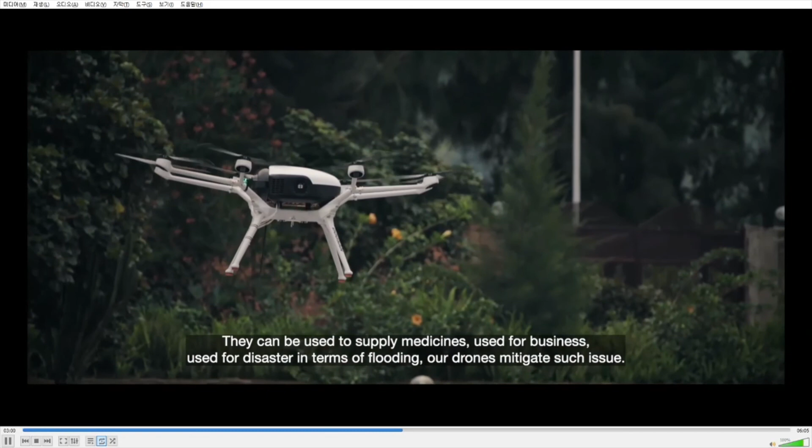In terms of disasters and flooding, how do you mitigate such issues? Doosan Mobility Innovation is specialized for hydrogen fuel cell technology, which can enable long endurance flight with the drones. With hydrogen fuel cell technology, we can fly longer, up to more than 2 hours, with multi-copter drones.

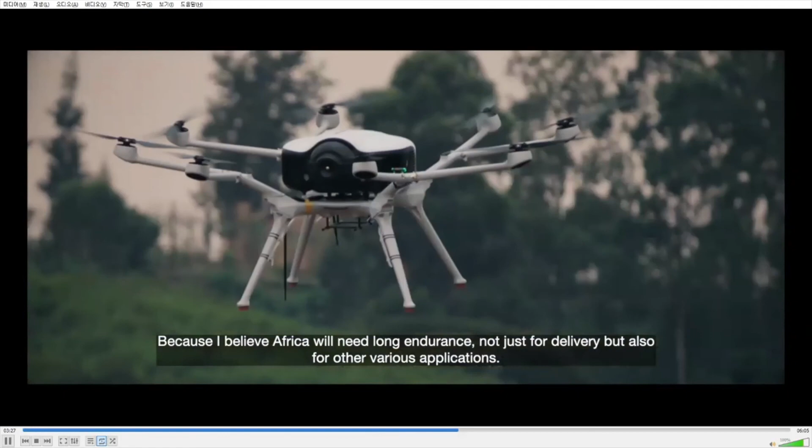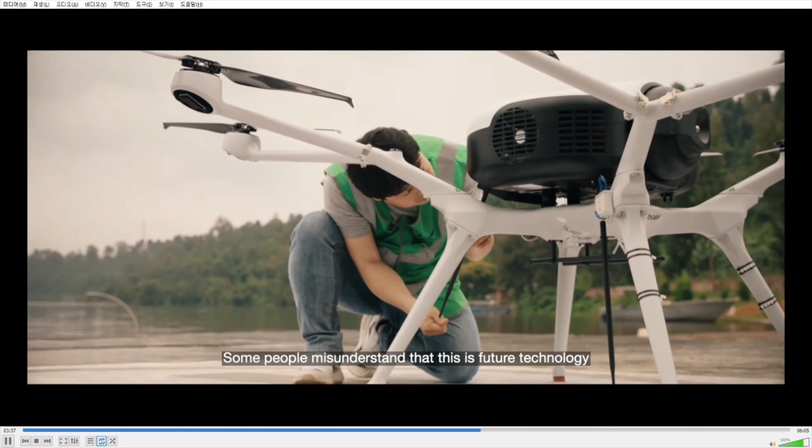I believe Africa will need long endurance, not just for delivery, but also for other various applications. Some people misunderstand that this is future technology, but this is actually in place and available, so you can use this technology for the application that you are pursuing now.